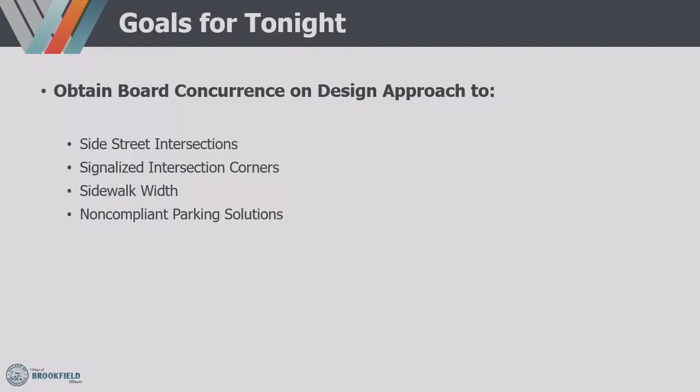So a little background - we haven't talked to you in about a year on this - the project includes studying improvements on Ogden Avenue from Eberly Avenue to Custer. That's the entire length of Ogden through Brookfield, approximately one mile long. Ogden Avenue is an IDOT right-of-way, and since we're using federal funding, IDOT will have to review and approve all of these improvements. It also includes coordination with the Village of LaGrange, since the west half of the Eberly Avenue intersection is within LaGrange village limits, and coordination with the Village of Lyons, as the east half of the Custer Avenue intersection is in Lyons.

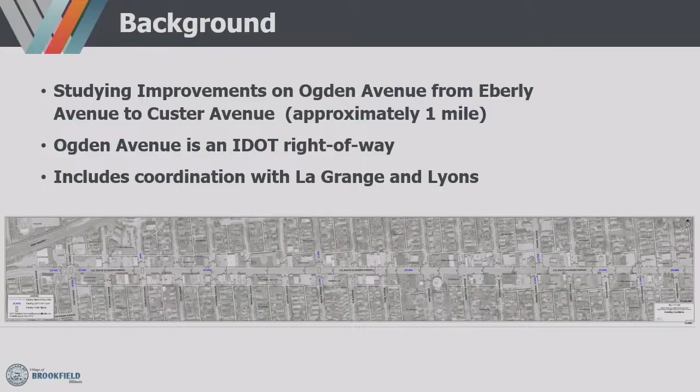Just a high-level overview of the scope of work: we're going to replace all of the curb and gutter. Right now there's a lot of roll curb out there; the proposed curb will be a barrier-type curb, 6-inch height, with defined driveway openings. We're also going to replace all of the sidewalk - typically we have about a 10 to 11-foot sidewalk up and down the corridor on both sides, and all of that will be replaced. There will also be streetscape elements included. Nothing on this list is final, but what's being contemplated now is a strip of brick pavers at the back of curb, along with some benches, planters, and trees.

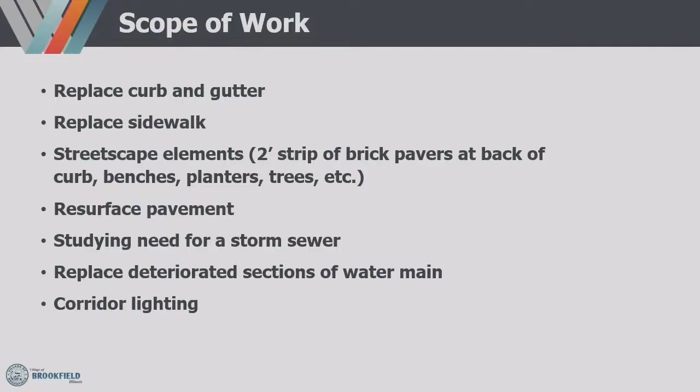It'll also include resurfacing the pavement, and we'll study the need for a storm sewer. LaGrange actually has a large 78-inch storm sewer in Ogden right now that carries mostly their flows. We're studying whether it would be beneficial to include a separate large storm sewer for Brookfield's storm flows on Ogden, with a separate outlet into Salt Creek. We'll meet with Public Works to discuss the condition of the water mains on Ogden Avenue and replace any that are deteriorated or need replacement before putting concrete improvements over them. There will also be corridor lighting - certainly roadway lighting, and it may also include pedestrian-level lighting.

Just a quick project schedule. Tim touched on this, but right now we're in the preliminary environmental and design study, also known as Phase 1 engineering, which you're familiar with from our other federal projects like Burlington, Brookfield, and Grand.

This is the preparation of the Phase 1 project development report. As part of that, there were business owners focus group meetings held in September and October of 2023 to get stakeholder input. There was also an initial public information meeting in March of 2024, and we anticipate a final public information meeting probably in summer 2026, to present the final agreed-to improvements to the constituents.

The second phase of this, after Phase 1 engineering, is Phase 2 engineering - detailed design engineering and contract plan preparation. That won't begin until the Phase 1 report has been approved by IDOT. After that, we go into preparation of contract plans and specifications, and also during Phase 2 engineering, right-of-way acquisition will be performed. We anticipate that'll start in 2027.

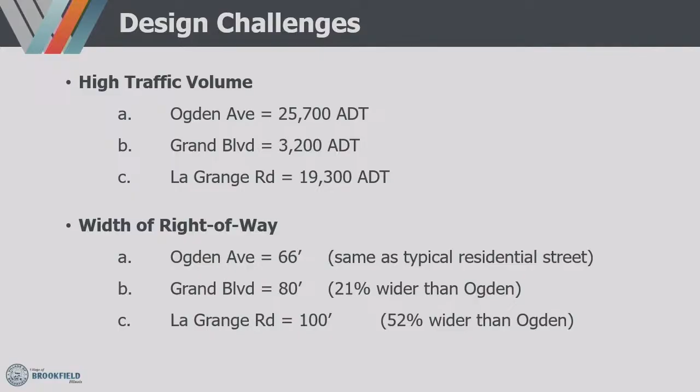I listed a couple streets just to put it in perspective. Grand Boulevard, with almost 10% of the ADT, has an 80-foot right-of-way, 21% wider than Ogden. And then LaGrange Road down in downtown LaGrange has a 100-foot right-of-way, so they're 52% wider. When we look at LaGrange Road and see that nice parallel parking and the 15-foot sidewalk, it's just a much different corridor than we have on Ogden. And yet, we have some ideas to try to improve things out there and make it a safer and more inviting pedestrian experience.

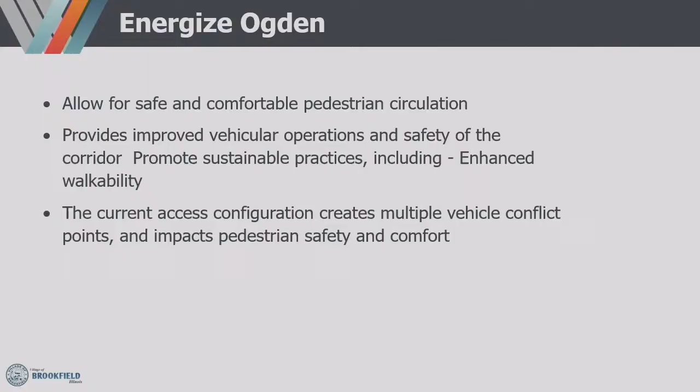They identified that current access configuration creates multiple vehicle conflict points and impacts pedestrian safety and comfort. Again, this has been identified in the broader study on Energize Ogden. And even on our comprehensive plan, it included, with the pedestrian and bicycle improvements, a focus on enhancing the safety and comfort of the multimodal network in order to expand transportation choices and options for residents of all ages. And when they talk about access management, it identified Ogden Avenue in particular, combining high-speed travel and excessive curb cuts, resulting in dangerous ingress and egress conditions.

Their recommendation was to consolidate curb cuts. This isn't new, is all I'm trying to point out. We've had several groups get together, talk about Ogden Avenue, what hinders us from having a better business community out there, making it more walkable, and it's the same thing that we hear time and time again.

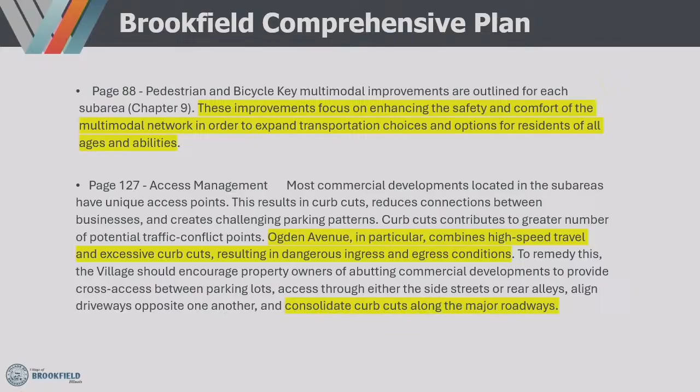We did also have a public information meeting last spring, hitting on more comments, but a desire for more pedestrian and bike accommodations, improved safety at existing facilities. They identified cars parking on the sidewalk create unsafe and unwelcoming feeling for pedestrians. They talked about cars on the sidewalk blocking the sight line when you're on a side street trying to make a turn onto Ogden. I won't go through all the others, but I think you get my point.

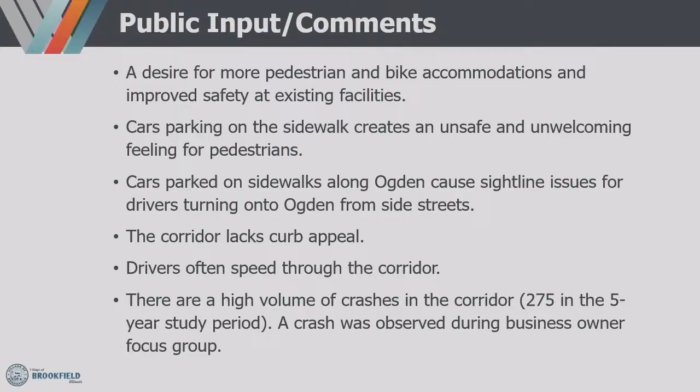The issues out there are identified by many, and we want to go ahead and make these improvements, and we've got some solutions to present. So with that, I'll go ahead and turn it over to Jim.

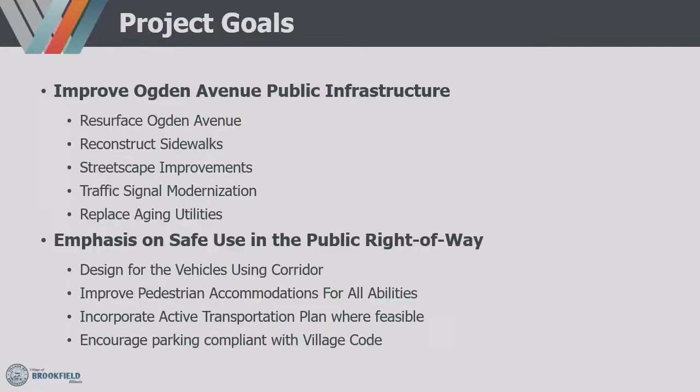We are going to be incorporating that active transportation plan where we can, and we want to encourage parking that is compliant with the village code. Just touching on the four issues we're going to be discussing tonight: the wide side street crosswalks, the tight corners at the signalized intersections, the narrow sidewalks, and the non-compliant parking.

Non-compliant parking has a couple different instances, different types. Some of it's within the public right-of-way, maybe on the sidewalk or overhanging the sidewalk or public right-of-way. This also includes vehicles that are required to back out, cross over the public right-of-way, and onto Ogden Avenue — a very unsafe maneuver.

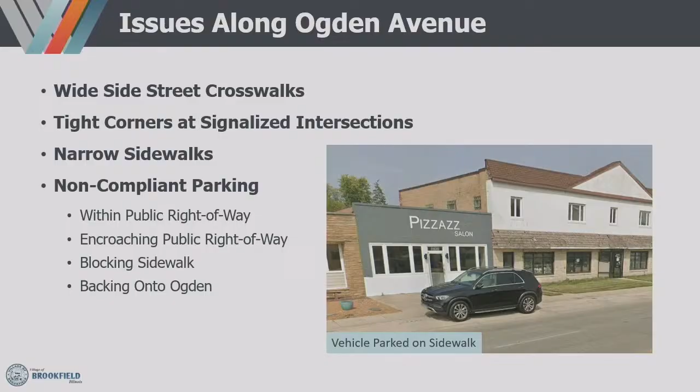So the first issue we're going to discuss is the side street crosswalks. Shown on this image is Deyo Avenue, just south of Ogden. You can see there's a really long crosswalk, no pedestrian space on those corners, and just this really wide pavement.

Our side street recommendation is to improve them, similar to what is done on Elm Street on the south end as well. You want to narrow the opening, really have a shorter pedestrian exposure, a shorter crosswalk, so they're on the street less time. This gives us more opportunity for some green space or pedestrian streetscaping out there. Depending on the full design of these intersections, we may be coming back to get a village ordinance to restrict some of the truck turning movements — essentially restricting the large semis or largest trucks that aren't using the street, signposting that they can't access the street to or from.

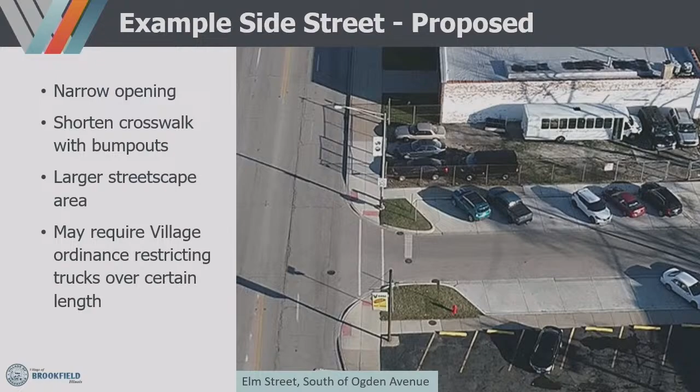I think we can discuss this one — is that what we're gonna do, Derek? Yeah, so the first two or three of these are actually kind of brief, but we wanted to see if, rather than going through the whole thing and forgetting our questions or ideas, is there any input on the side street, non-signalized side street improvements, taking this approach similar to what we show on screen now? My question is, would the goal be to do this on every side street in that whole corridor where it doesn't exist, or are there particular ones that are most egregious, or the longest looking at distance? All the side streets. Right, and part of the — can you flip back?

So we've improved Elm, whatever that was there, and this is Deyo. We've not improved that yet, but if we were to improve it, even with our street program, we would put in improvements similar to Elm. It's a better layout, and it allows for protected angle parking. Right now it's getting done when the side street is getting improved. We've done that in the past with our street programs, and I'd imagine if we have another one that bumps up to Ogden, we would do it. But the plan is if we don't get to these by the time Ogden is done, it would be done as part of the Ogden project. So depending which streets we improve, between now and say 2029 or 30 when Ogden starts, we could do some as part of our street road program.

And we're including those in our study, so they are eligible for federal funding.

Any board members have concerns about that plan for the side street intersections going forward?

Would that also include adding diagonal parking on streets where there isn't any? Yes, and we're gonna discuss some of that later on with the parking improvements. This is regarding the bump-out piece, and it's a bit of a win for Brookfield. We're typically restricted with this federal money within the Ogden right-of-way, and with the design team, the discussion was let's get as much of this angle parking improvement up to the alley. Again, assuming we get the 80% funding, that's the win for us. So yes, we'll try to improve all of those streets that don't have that layout now.

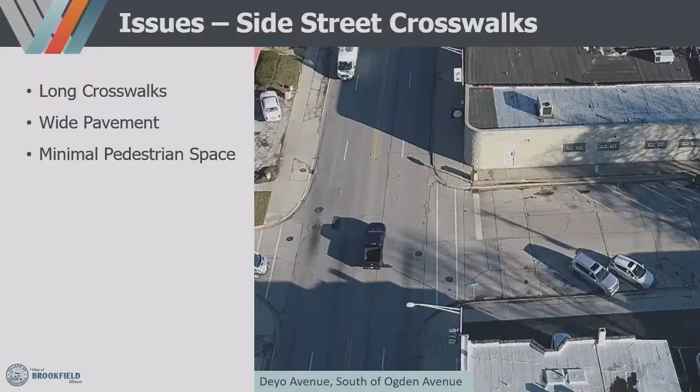And then if I could, what I'm hearing is a consensus on this side street approach design. Yes. So, thank you, Jim.

All right, so the next issue to discuss is the signalized intersections. These intersections have been designed a long time ago, no different than any of the other side streets, so we have really tight corners. Different size trucks are using these. The signalized intersections are seeing higher traffic compared to the side streets, so that's usually where the trucks are going to be, and at each intersection it's different size trucks using it. So we want to make sure we are designing to the vehicles that are using it, not what we are required by the design manuals from IDOT.

And then a lot of these trucks are overtopping the sidewalk, going onto the sidewalk and even beyond it. As you can see in this image, this is at East and Eberly, at Ogden, at the southeast corner. There's just records of this happening.

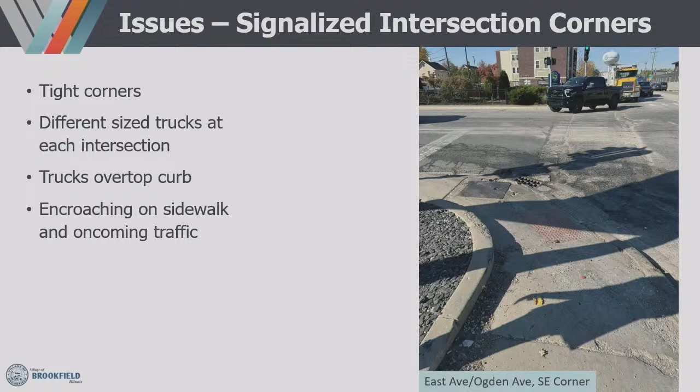I'm going to flip through a bunch of pictures here, but before I do, I just want to give a highlight of the different size trucks that are out there and the different lanes we have. So on top is a passenger car—this dimension showing 19 feet, that's anywhere right around 20 feet.

Delivery trucks are 30 to 40 feet, a school bus is going to be 40 feet. Emergency vehicle fire truck, that's at 42 feet, and that's going to be the bare minimum that IDOT's going to require—you have to allow a fire truck access.

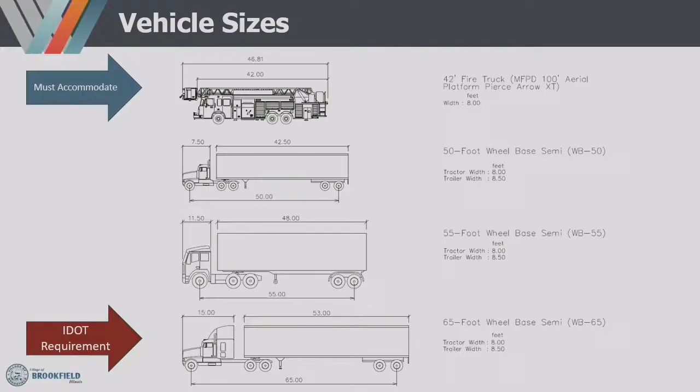Then we get into the larger semis—50, 55, 65 feet. For a roadway like Ogden, if it was to be designed brand new, they would want to accommodate the 65-foot wheelbase trucks on all streets, all turns, all corners. Right now, that truck can barely make it through Ogden as it is, so we do not want to approach our design looking for that. We want to figure out which cars and trucks are using each of these turns and make it a more customized approach.

So here's some images from East and Eberly. We're on the southeast corner looking northwest. These were all pulled from one day, just a couple hours, pulled really quickly—we didn't have to search through the camera for any of these.

So here's a garbage truck, you can see he's going up on the curb. Here's a dump truck again, getting up onto the sidewalk a little bit. Here's a large semi—you can tell he's using both lanes going northbound and also turning into the turn lane on Ogden, so he's taking up a lot of space.

How long is that truck? Approximately, what, is that like a 60, one of the? It's probably either 55 or 65. Okay, so he's—and then he goes up onto the sidewalk as well.

Like we were discussing, there's little space on the corners as it is for pedestrians. I would not want to be standing on the corner when he's making that turn—you're definitely backing up.

Here's an eastbound truck similarly making that turn, and he's probably—it's hard to tell—probably going up on the sidewalk as well. Just another instance of the truck using all of the sidewalk. So these are some of the conditions that you may not be seeing out there, but we are capturing.

I'm just glad you didn't capture my car.

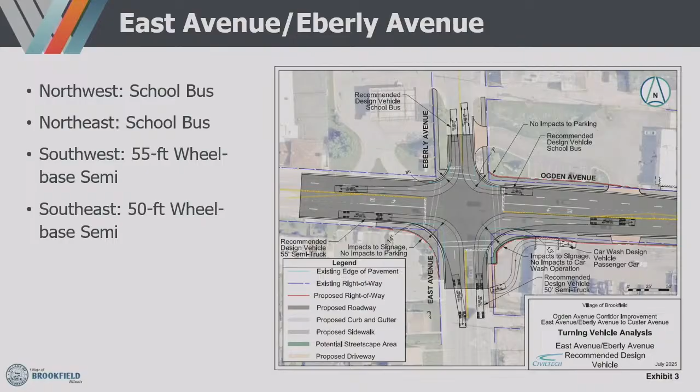We know we have the signal knockdowns. These curbs will stay like this for 50-plus years, so I would encourage everyone to take that long-term view of this. I know there's some pain involved when we take the private property, but this intersection certainly needs to be improved. We could debate how much, but...

Not to get too far in, but if LaGrange didn't consent or go along with the southwest corner and we made changes to the southeast corner, is that a scenario? Yes, we would have to get concurrence from LaGrange on our design. So if we're getting a lot of pushback from them, we could, in theory, change our design. Okay, and I'd like to think that they would, in the spirit of cooperation in the long term - we know those lights and signals get hit all the time.

I know none of us are taking this lightly, these are major changes - removing signage and right-of-way is important - but I was curious how that works, because I know it's not an issue for the north side at all, with Eberly and Ogden on the northwest corner, but I was curious about the process. Just to clarify the question: if the village of Brookfield wanted to improve the southeast corner and LaGrange did not want to do the southwest, can we still do the southeast corner?

That's potential. East Avenue is a Cook County route, so ultimately design decisions are going to be up to IDOT and Cook County. However, having support of the village board and everyone else here, we can approach them for a variance for the lesser design. I'm not sure how the discussion goes with IDOT and Cook County, I don't think they necessarily limit us from improving our corner, just how they react if LaGrange wanted to stay at a radius that would only accommodate a 40-foot delivery vehicle.

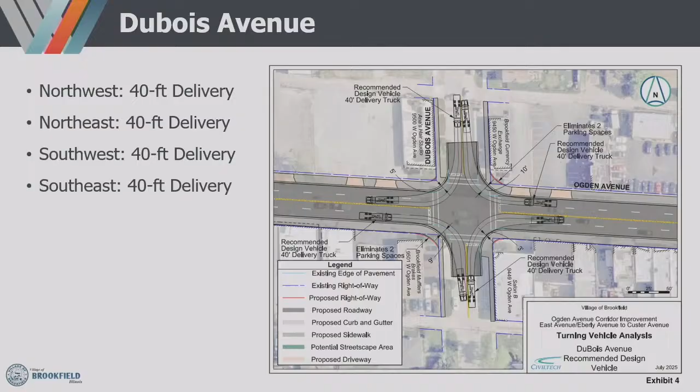Everyone okay with the design for Dubois? Yes. And so the edge of the street, the edge of the curb into that blue line, is that the village-owned portion, the royal blue? Yeah, the royal blue is the public right-of-way. And then there's a lighter blue, it may be hard to see, showing the current edge of pavement. So we dimensioned how wide we'd be widening on each corner. Okay, thank you. I think there's a clear consensus from the board on Dubois. Moving on to Maple then.

Questions, comments, concerns from the board about Maple?

Just to reiterate what Jim said, right now some of the sidewalk, some of the roadway is actually on private property, just because the right-of-way is not accurate. When they improved this intersection 30 to 50 years ago, they built on what is actually private property. So part of our property taking here is just to clean up what's out there now.

And then we are taking some for intersection improvements. Will you note where there's, like, may impact one parking space, for instance, on the northwest corner? Is that because of the way the radius is needed? That kind of coincides with the wider sidewalk too.

Yeah, with widening the sidewalk there may be some impacts. It would impact a parking space in the business's parking lot? Potentially, if we go to the full 10-foot width there.

If you could see that corner right there by the Dunkin' Donuts and the Taco Azteca - by widening the sidewalk to the appropriate level to have a traveling sidewalk, it might, if you could picture that, take that last space there in the corner of the parking lot.

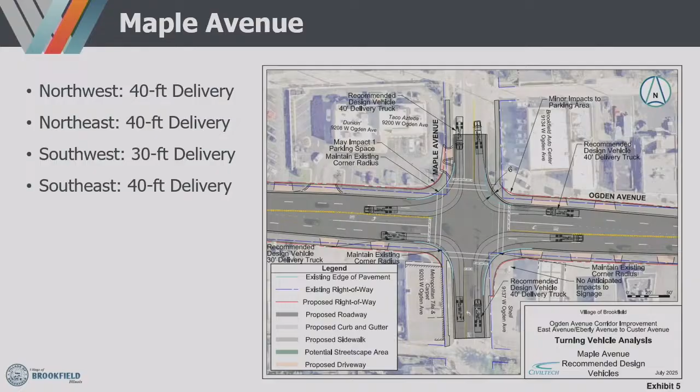I mean, if you're concerned about people turning as they're going northbound on Maple, making a left turn to try and go there, maybe that can be dealt with through traffic ordinances or control that way. But it seems when that was originally approved, there was a do-not-enter sign on that, so it was only meant to be - you could turn going southbound.

I think it's more too that because there's backups kind of in and out, there's cars probably crossing the sidewalk there when they shouldn't be, because they're inching out into traffic, and the same going in when you're waiting in line to get into the drive-through - it creates even more of a sidewalk backup if there are people trying to cross. And it's so close to the corner. Right, yep, but it was approved and that's the design, so I think there's probably not much in this project that relates to that.

I've got to know - I'll talk to staff. I think that's a code enforcement issue, I'm not sure that's even the right phrase, but I'm not sure this is part of the Ogden project. If that's a problem and there are some accidents observed, the Traffic Safety Committee can look at it. It's a good point bringing it up.

But other than that, is there a consensus to support the Maple Avenue signalized intersection design? Yes. Okay, on to Prairie then?

And then over at Prairie, very similar - not much change, some 5 to 6 foot widening of the southwest and northeast corners. What vehicle are we accommodating there, Jim? A 40-foot delivery vehicle on all except the southeast, which has additional pavement to use for the 55-foot wheelbase. Again, what primarily utilizes Prairie is the delivery, 40-foot delivery vehicles.

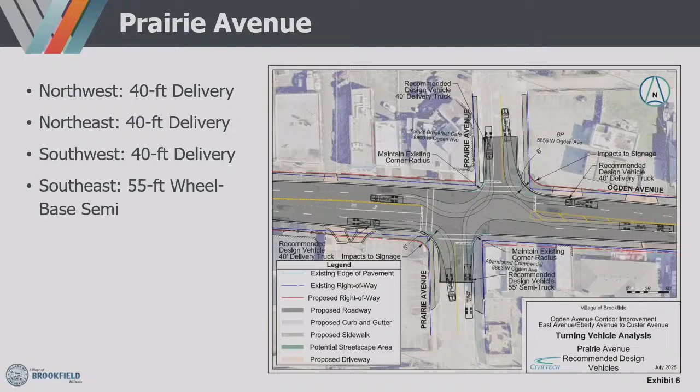If the traffic safety committee might make a recommendation, we could approach IDOT. We might be able to, I'm not sure, but we could certainly approach IDOT. Let me approach Mike and Terry and the traffic safety committee and see if we can do something prior to this project.

But I don't know, it's more than just signage. I mean, the turn is allowed now, there's just no lane. Oh, it is allowed now? I thought you said it is not allowed. It is allowed, but it's not used very often.

It was meant not to be allowed. I recall when it was resurfaced, I think they striped it wrong and put a turn lane in, and there's a lot involved. Let me look into that as a separate issue with the traffic safety committee and report back.

Okay, yeah, I misunderstood - I thought you had said it was not allowed, and I was thinking, gosh, if somebody turned there and there was an accident, we don't have the sign, and there's liability and all kinds of stuff. It's a good point to bring up, and Chief Carvillis is in the back, and I know the Traffic Safety Committee can take a look at that.

But in general, is everybody else in consensus on the design for Prairie and Ogden? I have a consensus on the design of the turns. I did have a question, and we can save it for a future conversation, but just to note, we just did that.

AARP bike corridor audit - sitting at the southeast corner there, there isn't a crosswalk to go across, but there's also no signage telling you how you should appropriately get across.

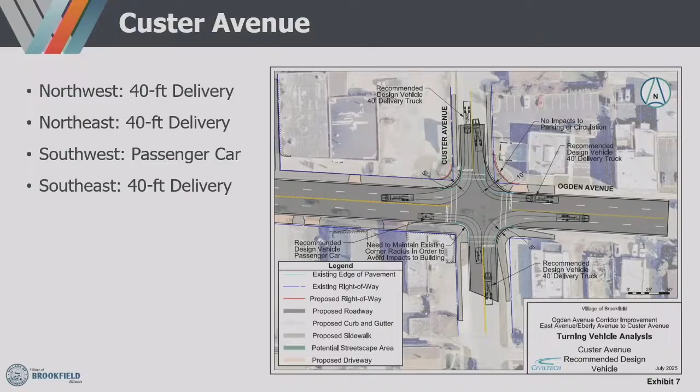All right, any other questions, concerns on Custer? So there's a consensus with the concept as designed here? Yes. Yes. Okay. All right. Thank you.

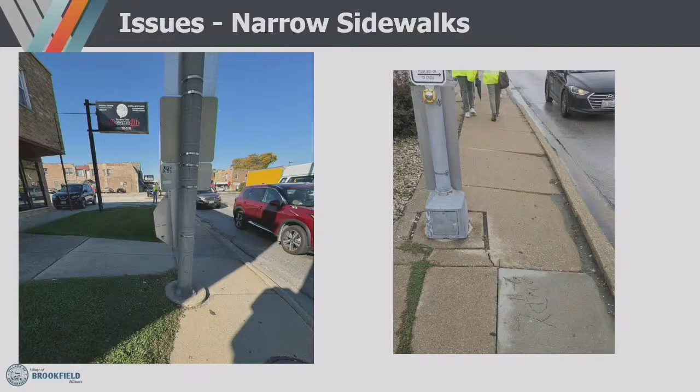So, we'll move to the sidewalk issue. Out there now, as you're probably aware, very narrow sidewalks. Here are some images. Especially at the signalized intersections where we have 5 lanes, the sidewalks are maybe 3 to 4 feet wide. The image on the right, in the background, you can see the 2 legs walking away, they barely both fit on the sidewalk, so a lot of challenging obstacles out there. Signal posts are right in the middle, so our recommendation, we really want to maximize the parkway space with wider sidewalks. 10-foot sidewalks where it's feasible. We want to incorporate the streetscape elements. When I say 10-foot sidewalks where feasible, we're not saying take down buildings to have the wider sidewalks. At those locations, we'd be narrowing down to what's out there now, 5 feet, 6 feet.

And some of those parking spots that we discussed at Maple, that'd be something we may be coming back or talking with the village on, our approach for some of those isolated conditions as well. This does require permanent right-of-way acquisition from about 44 parcels. Again, some of that is to clean up the right-of-way where the street is already on private property. Other areas, it's to widen that sidewalk so we can have 10 feet within the public right-of-way. That 44 parcel count does not include any temporary construction easements that may be necessary to build or provide proper cross slopes for the sidewalks to meet ADA accessibility guidelines. That's going to be determined later on during our design as we get into the detailed cross-section analysis.

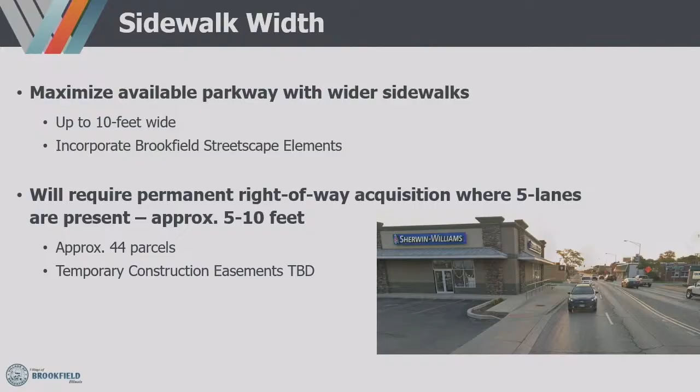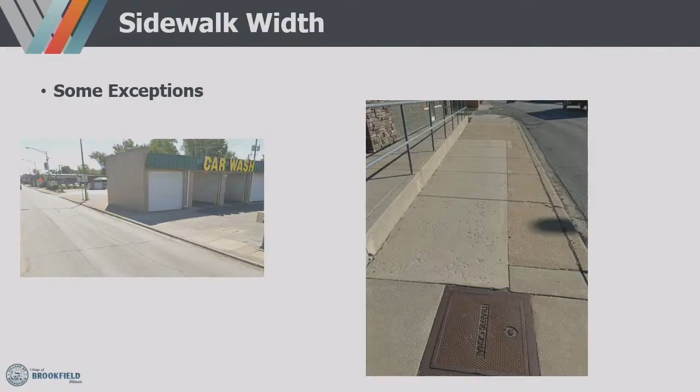And then as you get further away from the intersections, the roadway narrows down to 4 lanes, and we have about 10 to 12 feet of sidewalk on each side. So there'd be minimal right-of-way needed once you get beyond the intersections.

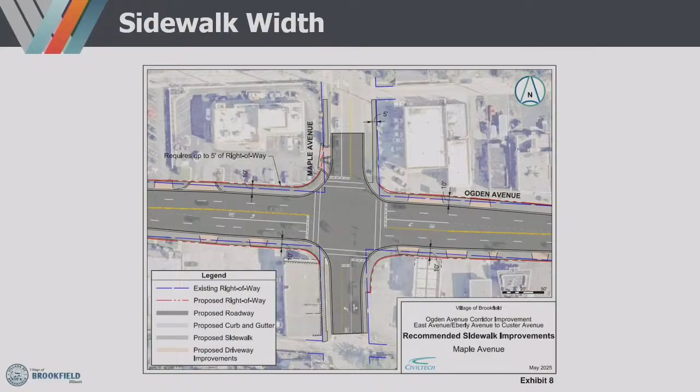Any questions, Derek, do you want to add anything? Yeah, so the reason, as Jim mentioned, that the sidewalks narrow down at the signalized intersections is because we're adding a turn lane. We just added 9 or 10 feet of pavement there, so we lose it in the sidewalk. And the thought is, where we can, we're gonna go ahead and maintain those 10-foot sidewalks at these signalized intersections. We're not gonna be taking buildings down.

We'll go to a reduced width sidewalk, and maybe what would help, Jim, is if we can send an email to Tim with a summary of the locations where we're going less than 7 feet. IDOT requires 7 feet at the back of curbs, so we'll send a list of parcels where we're going less than 7-foot sidewalk. I don't think there were too many, and I think we can also send a list of any properties where we're impacting parking. I don't think that was that significant - a lot of the widening we did was in grass areas, so we're taking some property but not impacting parking there. But we can send you a summary that we can forward to the board.

I have a question. On the sections where the width is smaller, like the picture you showed of the car wash, and those types of shorter sections, what's a typical plan for protecting the pedestrians in those spots where you actually don't really have a choice, you're much closer to the traffic? Is there like a railing, or is there something typically done in those spots?

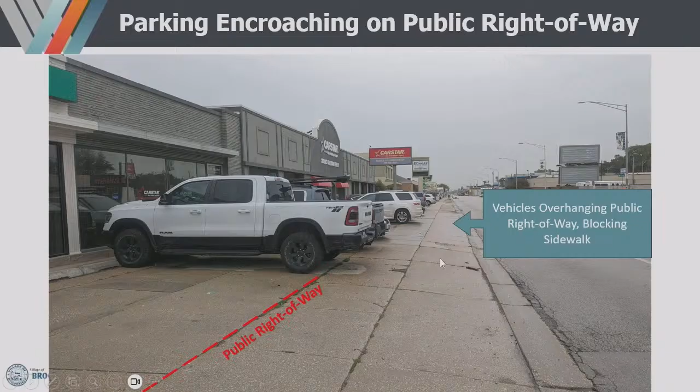We wanted to encourage compliant parking throughout the corridor. Here's a couple of images of instances that are non-compliant. As you can see here, cars parked overhanging the public right-of-way, highlighted in red where the edge of the sidewalk is. So if you are walking on the sidewalk, you are either bumping up against the bumper or going into the steeper part of the parkway, where if you're in a wheelchair or disabled, you're going to have a lot tougher time navigating through there.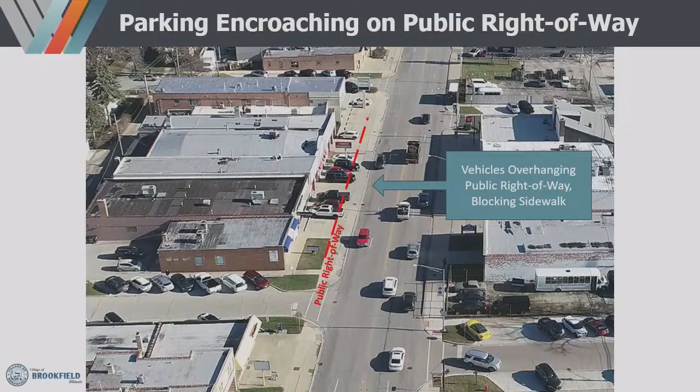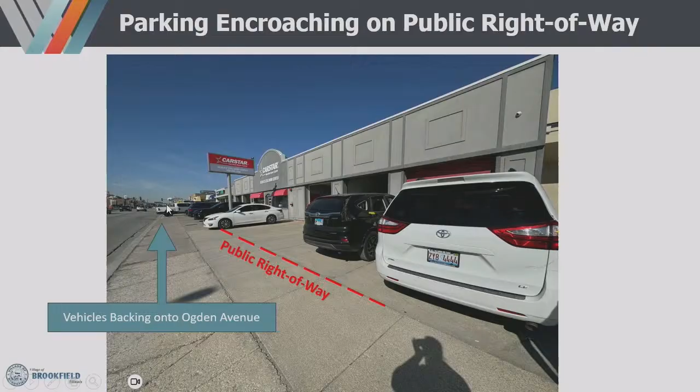Again, here's an image of a vehicle actually doing that backup maneuver, and more cars overhanging the right of way. And then in addition to that, in the background of the image on the left is a car parked on the sidewalk within the public right of way. There's a lot of vehicle tracks indicating continual parking within the sidewalks and the parkway.

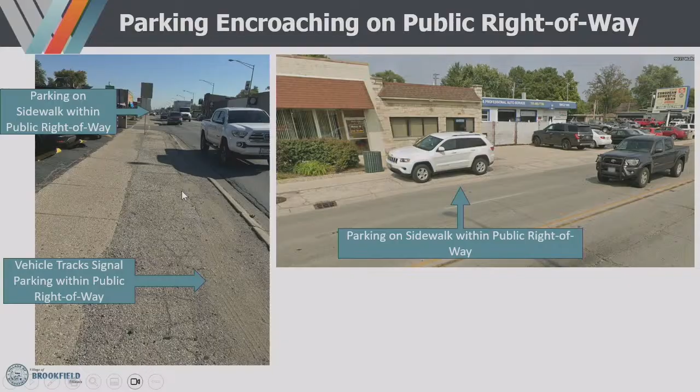So now, our approach for these non-compliant parking solutions. First, I want to touch on the village code. It says no vehicle may be parked, nor property owner maintain any parking lot or parking space to be occupied wherein any vehicle overhangs public right of way or public sidewalk.

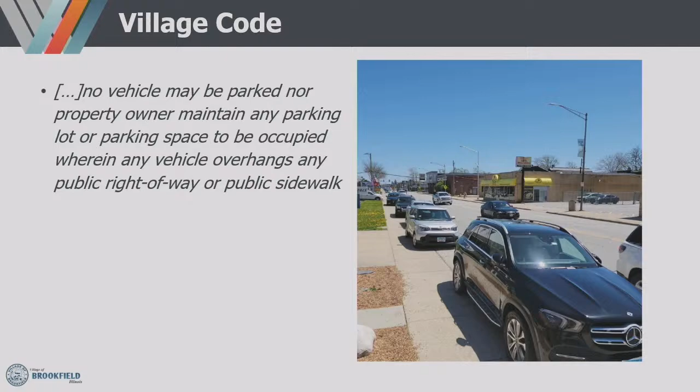So we've observed through our parking counts, on a Thursday and a Saturday throughout the day, 26 non-compliant parking spaces to be removed. I'm putting that in quotes because these aren't striped spaces, they are just parking on the parkway, non-compliant. In addition, there would be approximately 45 non-compliant parking spaces removed. I think that was total, right, Emma? Or is that the 45 of private parking on private property that would be impacted with our improvements. These are ones that overhang the Ogden right-of-way, use that as a backout lane, or they outlet too close to an intersection, and there are 2 locations of that.

So our goals here for the parking issues on Ogden: we want to eliminate non-compliant parking on sidewalks, and we want to mitigate these impacts with nearby parking on the side streets by improving the angled parking on the side streets.

Some of those solutions, we want to update the no parking ordinance along Ogden. I believe some of the ordinances are very old, dating back to when Ogden was a single lane or had a lot less traffic, but there are some blocks that have a no parking ordinance and some that don't, and we want to standardize that all along Ogden. We're also evaluating additional side street parking block by block. We provided some tables with parking data, and then if it's determined necessary, we'll evaluate municipal lots in a separate study outside of this one.

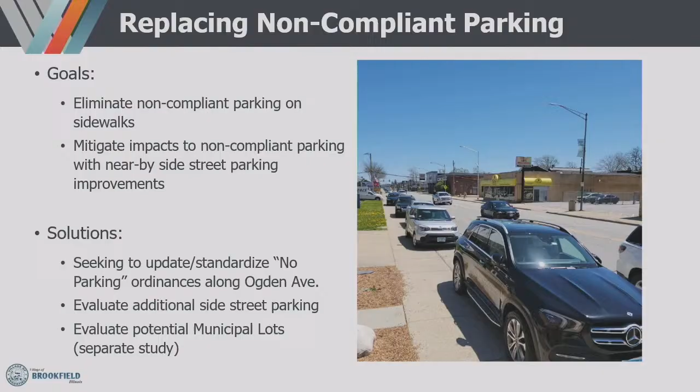Just to jump in, you distinguish between the 26 spaces that are non-compliant on basically village property. They're not true parking spaces to begin with, so there's the higher curbs. It's almost an enforcement issue going forward, but with higher curbs they can't park there. But to Trustee Naramatsu's point on the private parking spaces, accessing it would be more difficult. They'd have a big bump going over the curb, but they could, in theory, drive up onto it, come up a driveway, and park parallel there.

I think you stated it exactly correctly—it's an enforcement issue. If the village chose to, since it doesn't meet your ordinance now, you could ticket them now, I believe. And looking at some of the areas out there, it almost looks like they can park, or it's encouraged just because it's a paved area. As we bring in the streetscape elements with brick pavers, it's not going to look like you want to park there.

But looking at lighting too, in this picture here—I know we've talked about the parking ordinances before, that certain areas have no parking and certain don't. I don't think this segment had no parking, but isn't that illegal right now anyhow? So it goes back to enforcement in these areas, whether you can't park here because you're parking on a sidewalk, you're parking in the right of way. It said you can't even overhang the right of way, yet they're fully parked in the right of way. It's also just historic use.

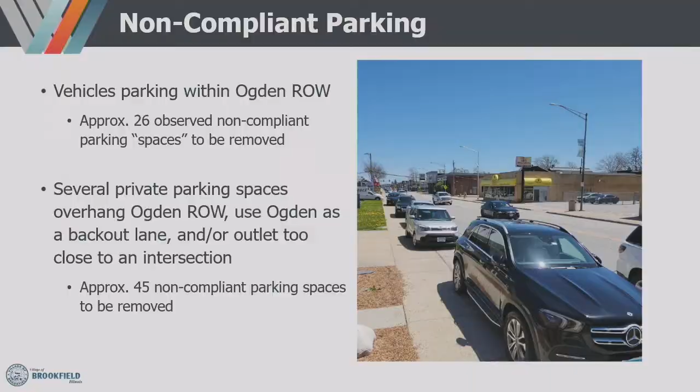There'd have to be an education campaign, signage, and things like this. I think what we're all realizing is we could prevent this parking right now immediately, but this doesn't have to wait till 2029—that's part of this whole project, this whole process. We're engaging the public early with many opportunities. When we go to our final public information meeting, we're going to be inviting the corridor and residents way beyond the corridor as well. Any property with impacts to parking, access, or right-of-way acquisition will get a certified invitation in the mail, notifying them of impacts to their property. So all the business owners—we're not hiding this from them. We're presenting it so we can get their comments and input.

We could enforce this tomorrow. This has been going on for decades, and in some cases, if we started enforcing it rigorously, the businesses may shut down. The whole parking they have on their site isn't compliant and shouldn't be allowed, but it would be a drastic change to how they operate their business. That's why our committee has spent a lot of time looking at these blocks.

Okay, so there will be a day, a time, I believe, when the board will say alright, it's done. Maybe it's not 2029, but if the board directs even before next year that this is what you want to do, then we have to start an education campaign now, send notices out, and start meeting with these individuals one-on-one. Mike will be with me, the police chief will be with me, but they will not be happy.

I was going to say it will be very—are the new parking additions, does that minimize some of the impacts, especially for some of the mechanic shops and things that really need that space? Yeah, we're going to get to that, and the good news is most of these areas have reasonable mitigation efforts we can make to give reasonable parking alternatives. We're going to get into that. There is one, maybe two, where there really are going to be some challenging blocks.

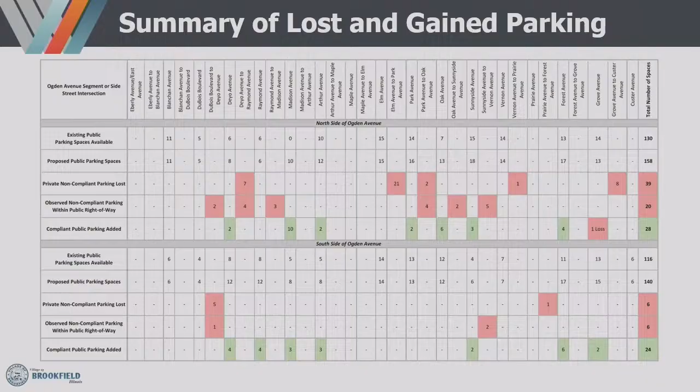Rather than compare it corridor-wide, because it's split up into north side and south side due to the challenges of crossing Ogden Avenue, we're going to step through and look at a couple of different segments.

Overall, on the north side we're looking at 39 private non-compliant parking spaces lost, 20 observed non-compliant parking within the public right-of-way, and we're adding in 28. So that's 59 spaces lost, though I put that in quotes since some of those are illegal parking anyway. On the south side, we're actually adding in more parking spaces than are being lost.

Between East and Maple, there's really one segment, right around Deyo Avenue, that's going to be very challenging, where we're having a tough time adding in more spots than are being lost.

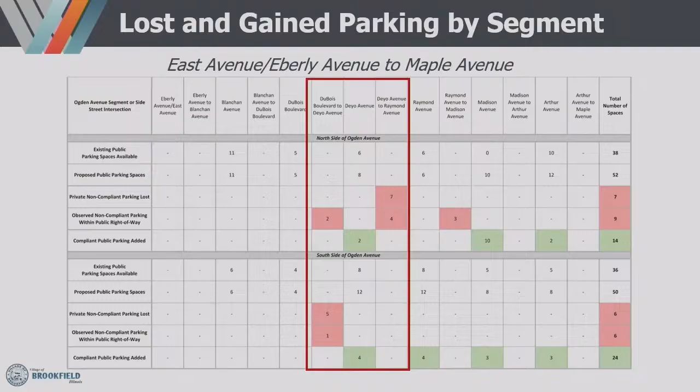Here's some images of what's going on there now. Again, cars overhanging the right-of-way, parking on the sidewalk. This is an image of that block from Deyo to Raymond, showing where they are parking and what is being done.

On Deyo Avenue, you can see the south side we are improving. However, those spots being lost are on the north. On the north side at Deyo, parking on the east side is already maximized. On the west side, we're looking to relocate the fire hydrant so we can add in 1 or 2 parallel parking spaces.

Over at Raymond, on the north side, the east leg is already improved. The west leg has a large driveway. So within this block or two, we're already maximizing the parking opportunities there, which then pushes the problem to the next block and the next block out.

I don't know if we want to pause here. This is one of the areas where on the north side, it's a car repair business. I believe some of the angle parking is taken by cars being stored there.

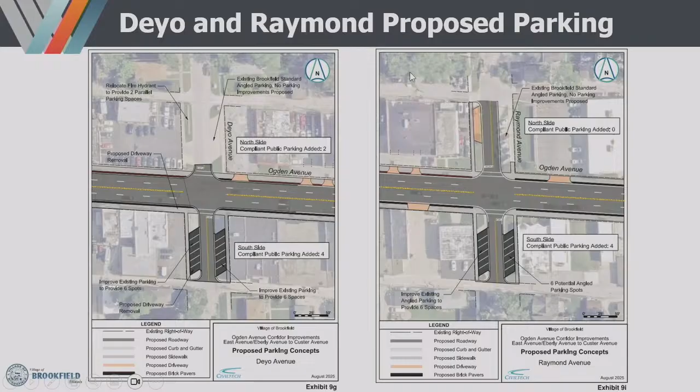Actually, I believe this business has a fenced-in car storage area to the west, so there just seem to be a lot of vehicles here.

Is the old Tony's restaurant still up for development? Up for sale? I don't know. There's nothing in it, right? Correct. So potentially it could be a potential parking lot, a municipal lot, a potential target for acquisition. It looks like this business has parking behind it on the alley, on the north side of the alley.

And there is the possibility of a former business becoming a parking lot, but we also have to consider what we want for prime frontage on Ogden Avenue becoming a parking lot, where there's a potential retail use or sales tax generating use or something else like that.

Derek brought up the point of north and south of the alleys adjacent to Ogden. Years ago, Brookfield Restaurant acquired the property north of the alley. It's now Tony's, and they put in a huge parking lot there for their business. Those are things that private business owners might have to consider.

The village could consider providing municipal parking, but I think we want to be careful targeting frontage on Ogden Avenue for parking, just like we wouldn't want to turn parts of Grand Boulevard frontage into parking. Prime lots, we might have to look at alternatives there.

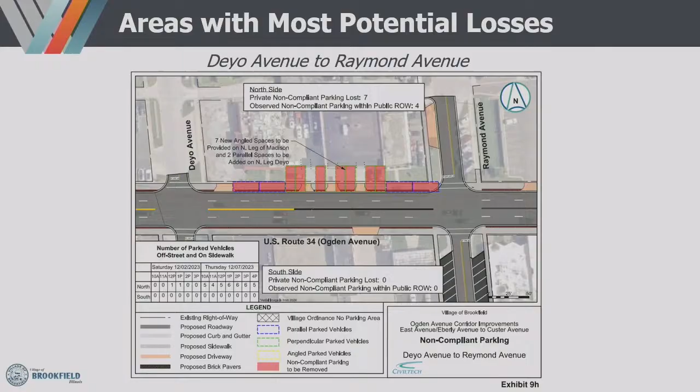Agreed. Agreed. Okay. And I guess the consensus we're looking for, I think we have 3 areas we wanted to look at this, Car Star, and I think there's one down by Grove on the north side. Yeah, and I think the next step is to go visit the property owner, and I think we have enough board consensus. We'll go explore options with them and then come back.

I'm not sure that we're solving this at a board meeting tonight. No, but I appreciate you coming forward, and I appreciate the board being very forthright with their consensus here. This is, we don't take these things lightly. We realize we could be impacting current businesses and the way they operate, but as Trustee Hendricks pointed out, if we don't do anything, Ogden Avenue is going to stay the same.

And every planning session we've had, every 30,000-foot view, we've always talked about Ogden Avenue has to change, things have to be different. And the slides that you started off with, it is absurd that people park on sidewalks on Ogden Avenue, and you think it wouldn't happen and you wouldn't have to put signs up, but people are trained to do that, they think it's acceptable, so the change is going to be difficult, but if this board doesn't do something about it, it's probably never going to get done.

And this is really good discussion, and if the board continues this direction, we will have these meetings with these business owners with the knowledge that the board has given us this direction, so we go there with that direction.

I go to some businesses in LaGrange, and they'll have a sign on the door that says, if you park in these spots outside, you're getting towed between these hours. Like, you can't go here. And I'm like, oh, so sorry. Yeah, I think I don't want a ticket.

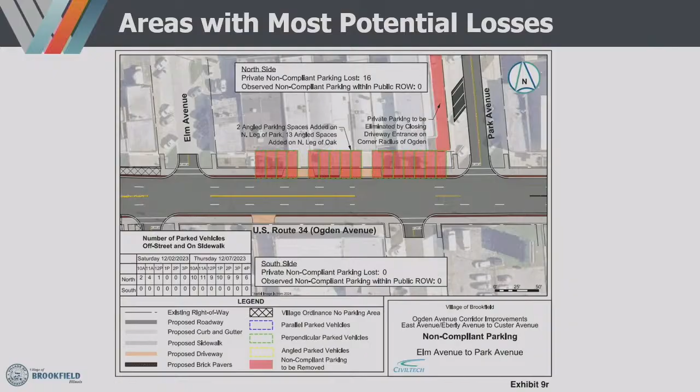We're identifying how many spots they currently use that would be lost with the Ogden improvement. Jim, are we adding any on either of the side streets, east or west? On Park, we would be converting that driveway into a sidewalk area, adding 2 additional spaces. Just two, but the other 2 areas are built out.

If I remember right, they had parking on the north side of the alley for just half the length of the alley, and we talked about buying the residential lot on the other half of the alley to put parking in. Again, there are expenses involved with all of that. I think on the block east, we may be adding a handful of spots too.

On Oak, I think there's... I'm looking at page 44 of our PDF. It seems on Oak Avenue there's 1, 2, 3, 4, 5, 6, 7 spaces on the west side, and 1, 2, 3, 4 on the other side. Are those existing or new? It varies. Okay, it's a net gain of 6. Okay, net gain of 6, that's helpful.

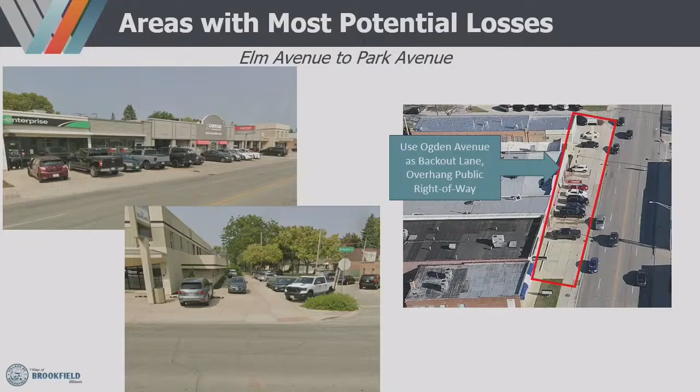Okay, for this business, can we just touch base? Grove should be a fairly quick discussion. Yep, and this is out on the corner, from Grove to Custer.

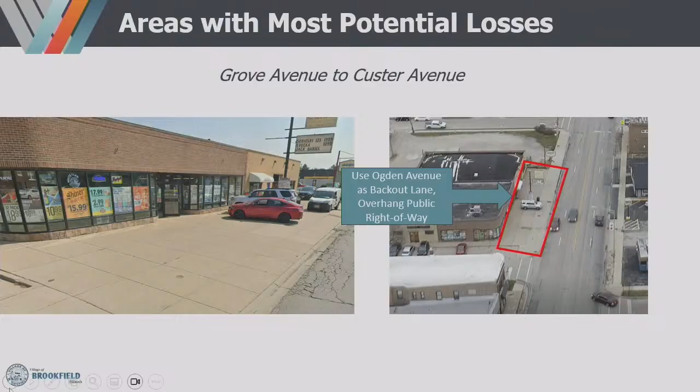The northeast corner of Grove is the liquor store, Phoenix Liquor, I believe. They have parking on the sidewalk, and on Grove it's 90-degree parking on the east side. We would be modifying that to angled parking, shifting from 90-degree to angled. You need more space for angled parking, so you actually lose a space by going to angled. They're adding angled on the west as well.

These west side spaces are net new as well. Do you recall what the numbers are, what we lost and what we added on the west? On that lot on the north side there is existing parallel parking on the west side, so converting that west side to angled and the east side to angled would result in a loss of one space. That one lost space seems acceptable. And this is also right next to Custer, or a block away from the Custer signal, where pedestrians could cross.

We're parking on the south side as well, where we are adding 2 spaces. Did we find out about the lot next to Amoco, or whatever it's called now? Is that their parking lot, the gravel lot on the northwest corner of Custer?

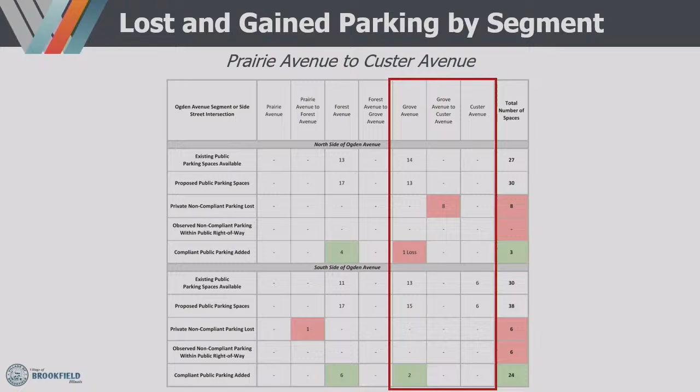Yeah, Tim, did we find out, or started looking? I'm looking at it. Do we look at a no-cash bid process for that, Custer and... I don't know. I don't think we know who owns that.

Because it seems like the auto repair place has tow trucks parked there, cars parked there regularly. To my point, we're taking away some of what they have off of Ogden, but it sure seems like they have that whole lot next to them.

We'll verify that. We wanted to mention this, but it seemed like a low impact, even if we're losing one spot.

I appreciate you raising it. Whether it's implied or not, I think there's a consensus from the board that on each of these, we realize there is going to be an impact. We're not ignoring that or being cold about it, but I think the direction I'm getting from the board is that these changes need to be done, and we're allowing time for this to be implemented. I think the next step is for you to approach the most impacted ones first, basically, and go forward from there.

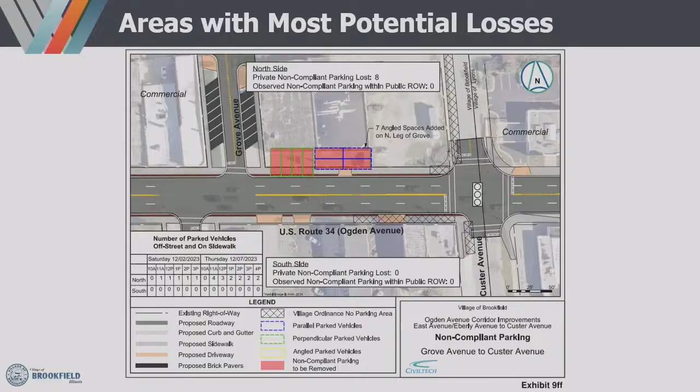That wraps everything up. Any other overall questions, discussion, going back to anything?

No, my original intention was to open it up for public comment if there was any, but looking at the public, I seem to know everyone, and I think they've had their chance or will have their chance. Before we got to the next topic on the committee, I wanted to see if there were any business owners here or anyone else who wanted to comment, since this was published, notice of the meeting and the topic went out, so I was going to open it up to audience comment since the village board has had a chance to comment along the way.

Can I go back to something you said right at the beginning, Derek, about adding a storm sewer? Yes. Is that being submitted? It's being studied, yes. Okay, seeing what design challenges, impacts, costs, and where it would be routed, but we're actively looking into adding a storm sewer.

Okay, thank you. We do have, if we could, just one or two more slides on next steps, and then we could wrap up.

So we're going to start incorporating the recommendations from tonight into our design, and then essentially bring that to IDOT for their review, concurrence, and approval, incorporating all that into our draft project development report. At the next corridor design committee meeting, we're going to start to get into some of the more specific streetscape elements that would be out on the corridor.

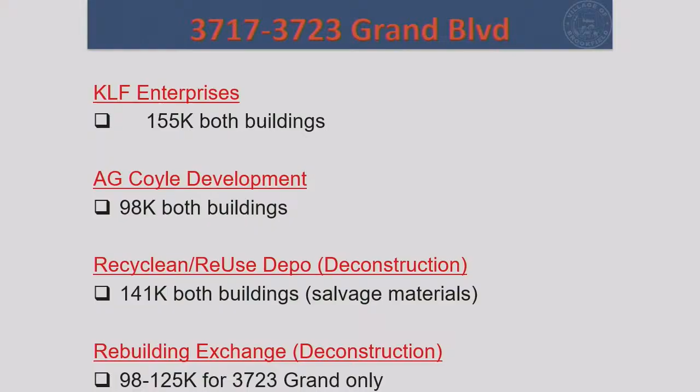So what I am looking for is direction on which way the board would like to go with either demolition or deconstruction, and then we would go to a full bid process following that.

I just have, KLF says salvage one pallet of bricks and a sign, and AG Coyle says they'd salvage 800 to 1,000 bricks. How many bricks are in a pallet, just so—that's my question, Trustee Ketchmark? A pallet of bricks is about 400 bricks.

Okay, thank you. And then in the third one, Reuse Depot, they said they would deconstruct it, but we wouldn't be able to keep any of the salvaged materials—they keep that for their own. So Recyclean takes everything out and then donates it to Reuse Depot. So for all the deconstruction, we don't keep any of it. It's basically donated—they're a 501c3.

Part of our discussion was using some of these bricks up at the shops for maybe some parts to the sign, to the pedestal sign. I believe you said there's a pallet of bricks inside—that would be the paving bricks. We do have a full pallet of both, actually, pavers and the other ones. Because the bricks on the building are building bricks, you wouldn't be making a sidewalk with those.

Kind of looking for direction here. The board did give direction to look at the various options for salvage and deconstruction and things. We do have to realize our financial responsibility—we're already into property acquisition costs, and we're still looking for proposals for development, so I know the board is considering cost and everything.